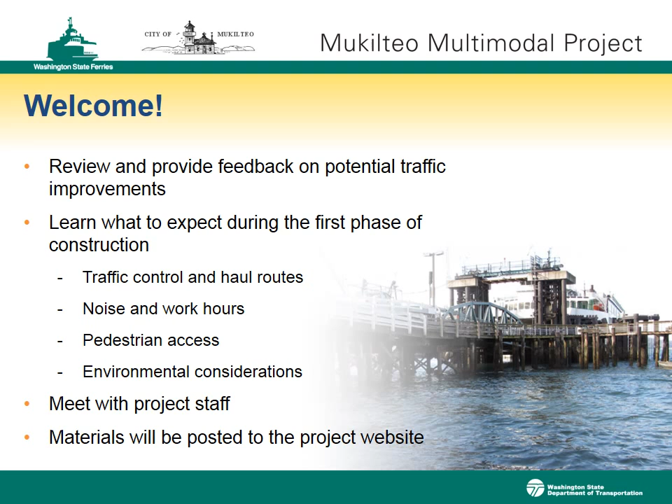First, let's briefly review the need for the project. The Mukilteo Ferry Terminal is more than 60 years old, and its timber piling foundation is vulnerable to earthquakes. The Mukilteo Clinton route is one of Washington State Ferries' busiest, serving almost 4 million passengers every year. The current layout makes it difficult for passengers to get in and out of the terminal and contributes to congestion, safety concerns, and conflicts between vehicles and pedestrian traffic.

This project replaces the aging dock and builds a safe and efficient new facility that enhances access to transit, including the Sounder commuter rail and bus service. This is a critical improvement to manage the projected growth in walk-on ridership on the Mukilteo Clinton route.

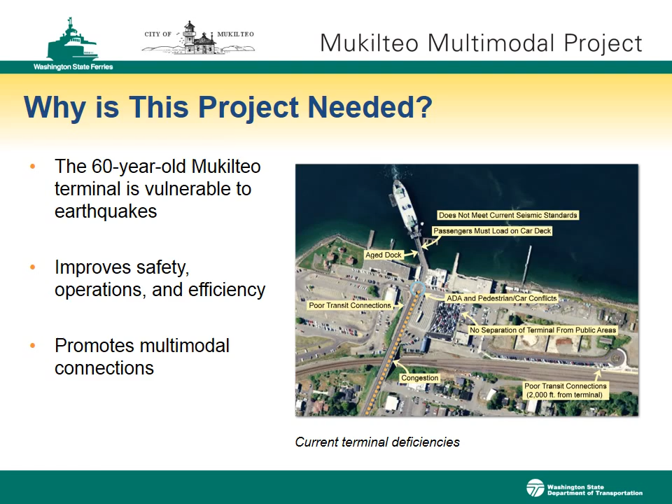The new terminal will be located just east of the existing facility. Key features include new terminal buildings and 4 new toll booths, an expanded vehicle holding area, a new transit center, and close proximity to the commuter rail station. The existing tank farm pier will be removed, eliminating thousands of tons of toxic creosote-treated debris from Puget Sound.

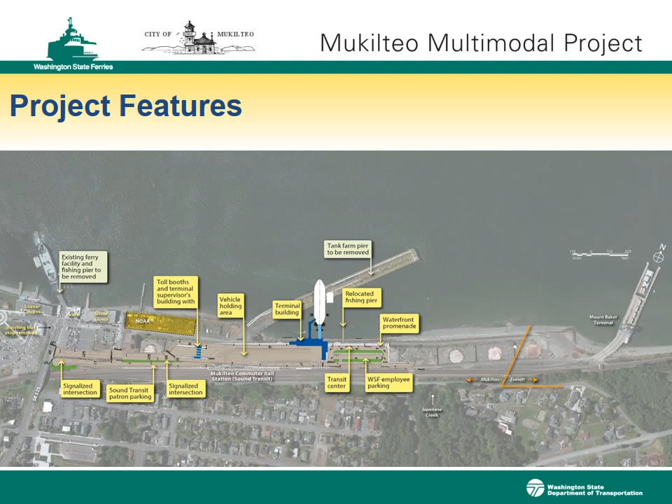The new passenger building will serve as the new ferry terminal hub and includes an overhead passenger loading ramp connecting to the second story of the new passenger building. It will be designed to reflect the cultural significance of local tribes and the history of the Mukilteo Point Elliott area. This project meets LEED Silver environmental requirements, and the design will limit building height to protect the view of the waterfront.

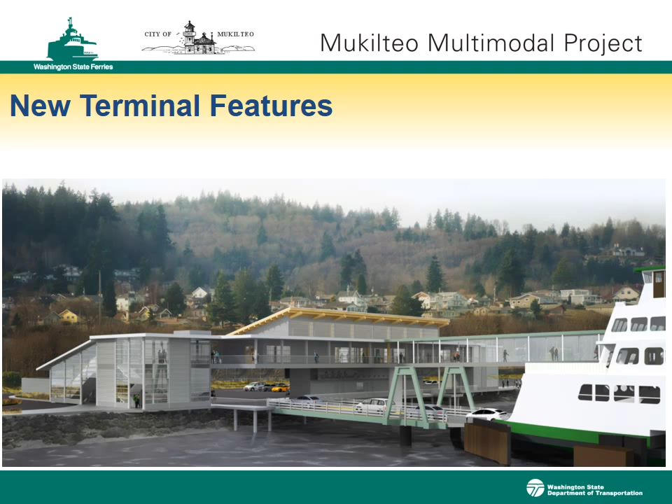The first phase of construction begins in early 2015 and features removing the existing tank farm pier and dredging at the new terminal site. The second phase of construction is scheduled from 2017 to 2019 and features building the new ferry terminal. The new terminal is scheduled to open in 2019, depending on funding.

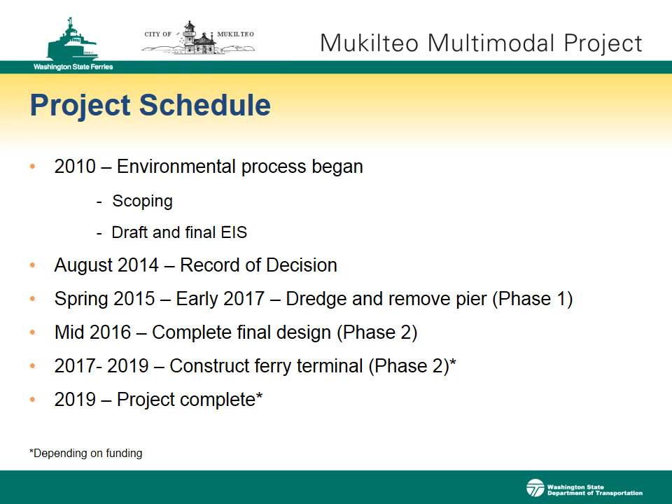Washington State Ferries' long-range plan projects a 73% increase in total passengers, excluding vehicle drivers, on the Mukilteo Clinton route by 2030.

The traffic analysis prepared as part of the EIS extended the long-range plan estimates to 2040. We expect a 124% increase in walk-on passengers during westbound evening peak hours. This will provide more efficient and safer multimodal connections for passengers on the Mukilteo Clinton route. Meeting these projections is a central aspect of the project.

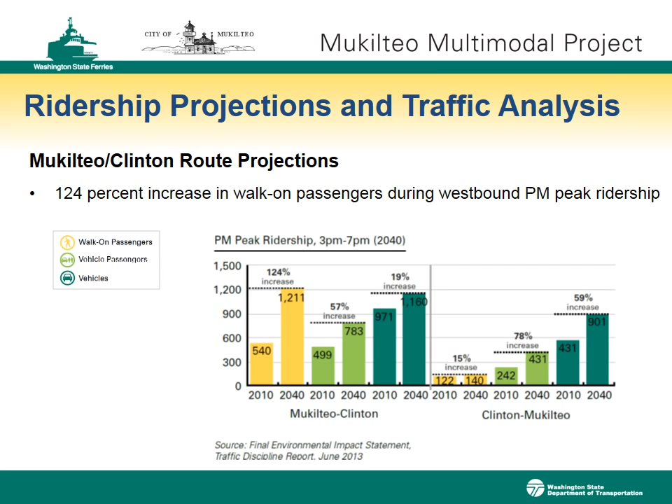Washington State Ferries and the city have heard your concerns regarding traffic near the terminal. We'd like to share with you 2 planned traffic improvements, as well as hear your opinions on additional improvements being considered in the area. Following the presentation, you'll have the opportunity to provide comment on potential traffic improvements and share new ideas.

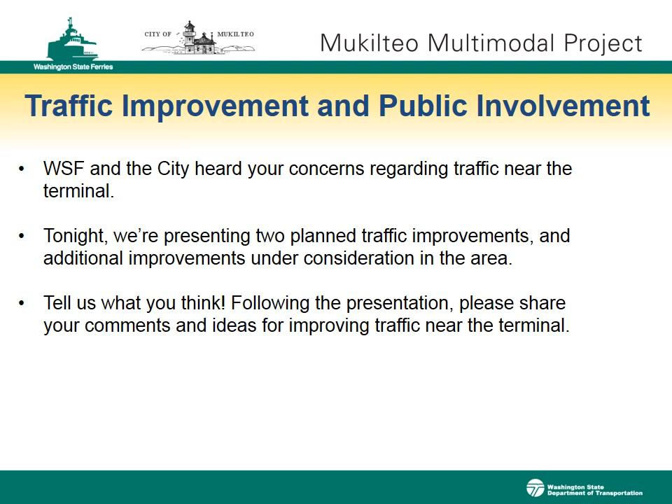The project includes 2 planned improvements, the first of which is to use the 2 new traffic signals to meter traffic as it offloads the ferry, allowing for breaks in traffic entering SR 525.

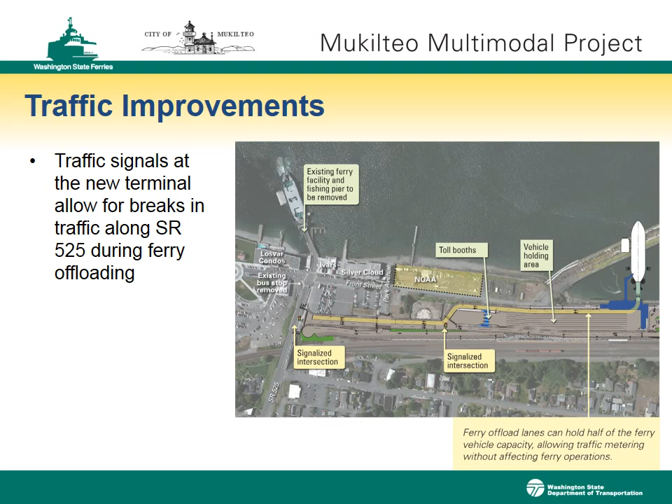Additionally, Washington State Ferries has identified 5 intersections where brush clearing and grading would improve sightlines for drivers entering SR 525. Signage could also be installed in holding lanes to limit car holding near intersections with limited sightlines.

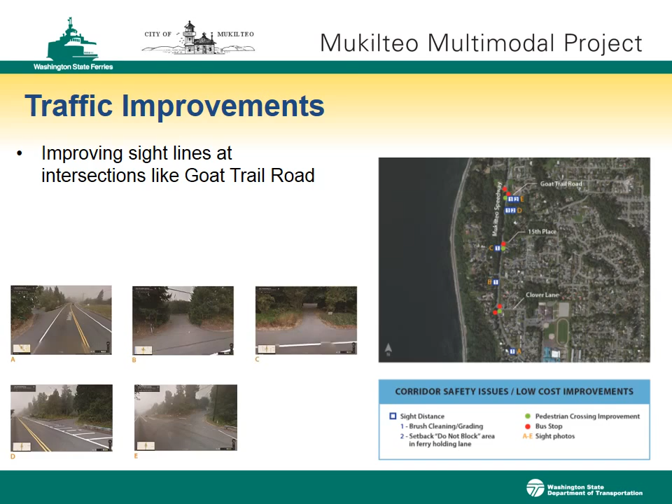The traffic analysis in the EIS identified 2 signals that would operate below acceptable level of service in 2040, at SR 525 and 5th Street, and SR 525 and 88th Street Southwest.

We heard from you at the Shoreline Permit public comment period. Washington State Ferries and the City of Mukilteo are working closely to identify other traffic improvements.

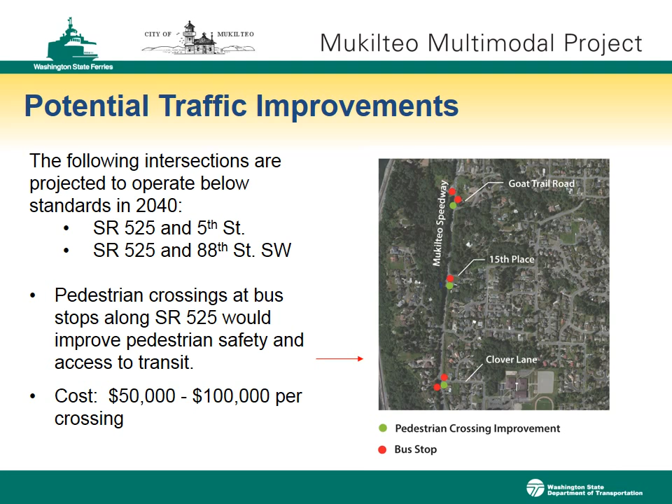A pedestrian overpass would improve safety and convenience for pedestrians and bicyclists accessing the waterfront. The City Council selected the SR 525 and Park Avenue plans as preferred alternatives.

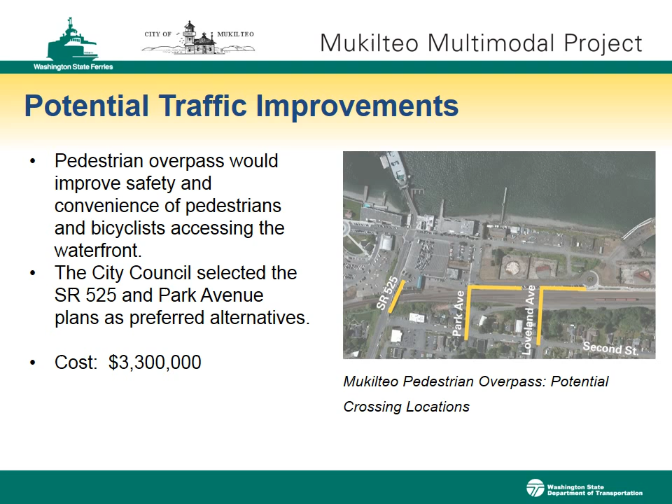There are also options for widening SR 525 at the Goat Trail Road intersection. Both options are pictured below.

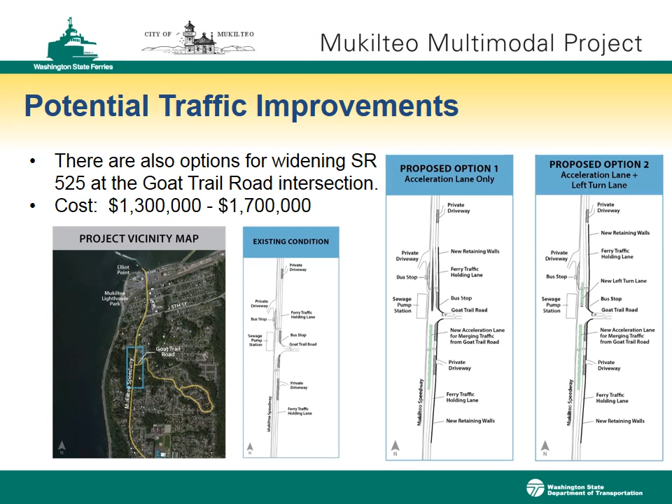Now we'll cover what to expect during Phase 1 construction. In-water construction will pause from mid-February through July in 2015 and 2016 to protect birds and wildlife, though other light work may continue during the spring-summer window. Phase 1 construction will be complete in early 2017, and construction of the new terminal will begin, depending on funding. Throughout construction, the ferry terminal will remain open.

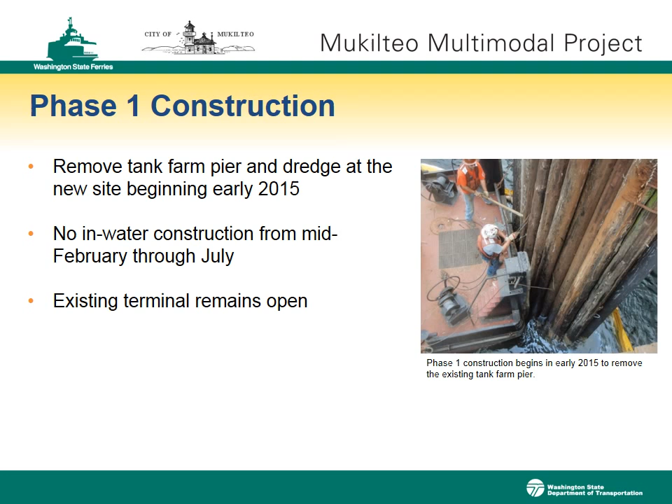Truck haul hours during Phase 1 construction are 7 a.m. to 2:45 p.m. Monday through Thursday, and 7 a.m. to 1 p.m. on Fridays. Incoming trucks will access the project site through the third toll booth through the ferry queue lane to bypass the Front Street SR 525 intersection. The third toll booth will be designated for construction vehicles during these designated hours.

Approximately 85% of all materials removed from the existing pier will be hauled out by barge, further limiting truck traffic. About 150 truckloads may use upland haul routes for removal of non-timber material from the pier and portions of the pier closest to the shore.

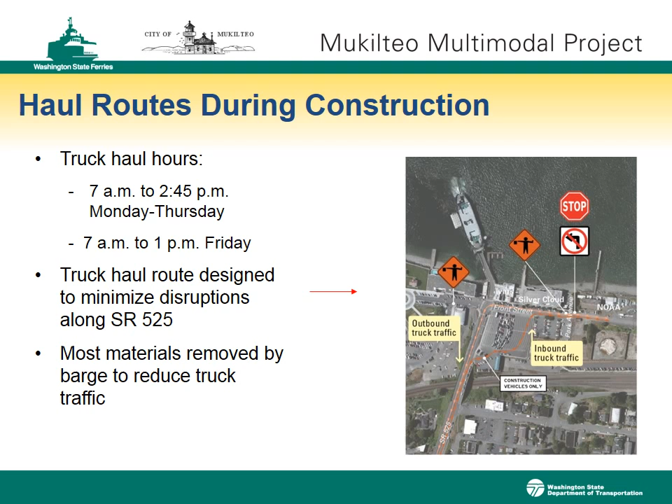Noise-causing construction is limited to weekdays from 7 a.m. to 6 p.m. and Saturdays from 9 a.m. to 5 p.m. Noise-causing work can only occur outside of these times by special permission from the city. Washington State Ferries may request exemptions for special and unusual circumstances.

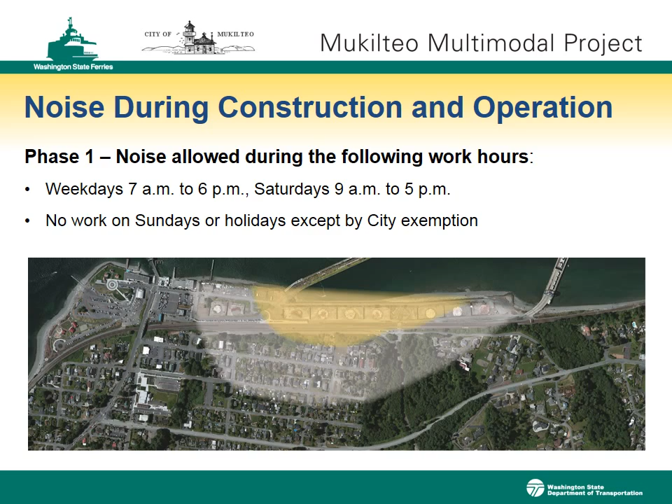Construction of the new terminal during Phase 2 will be slightly louder because of pile driving equipment required to build the new facility. Noise restrictions are the same as Phase 1. PA announcements at the new terminal will occur between 9 a.m. and 6 p.m. if required.

Emergency announcements may be made outside of normal hours. The new terminal will feature a smarter PA system with volume controls and speakers in multiple locations, which means less noise outside of the terminal area.

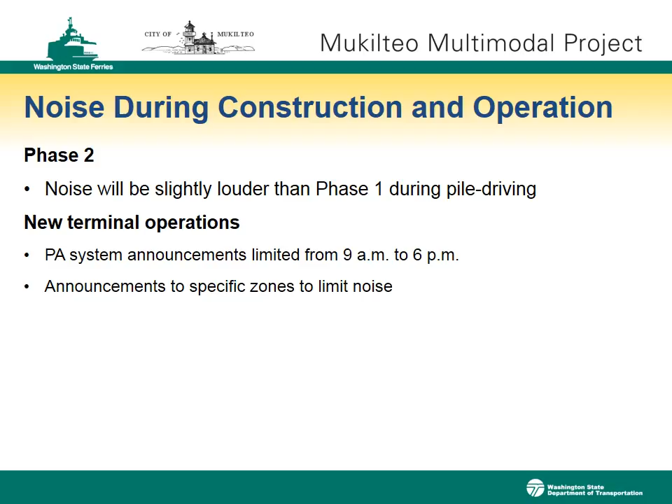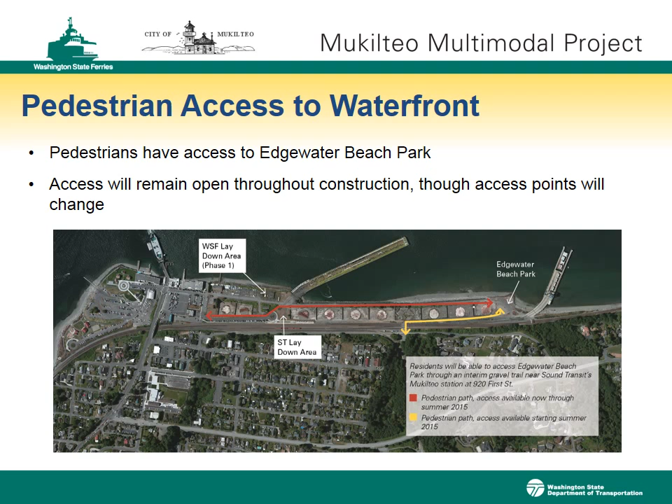Washington State Ferries will closely monitor the project site to meet all water quality standards during pile removal, installation, and dredging. Stormwater will be collected and treated during operation of the new terminal.

Recreational activities such as diving and kayaking will be limited at times during construction. Washington State Ferries will reach out to the diving and recreational waterfront communities to share information and ensure public safety around the project site.

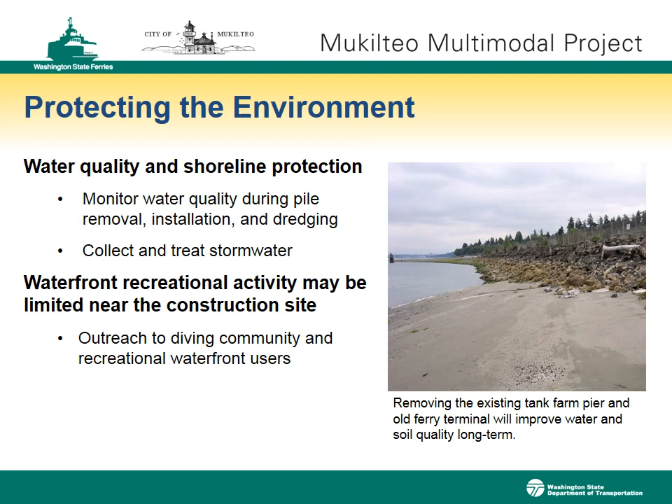Construction and new terminal operations will not have a measurable impact to fish, birds, or other wildlife. In fact, removing nearly 3,900 creosote-treated timber pilings will create a healthier environment.

The final environmental impact statement for the project includes several requirements to mitigate impacts to the environment, including having biologists on site to monitor nests and young birds in the project area, and only disturbing nests if they're threatened by construction.

Seasonal restrictions on heavy construction will limit impacts to fish and crab populations near the pier.

Following today's meeting, the project team will review comments and suggestions to identify the most important traffic improvements in the area. A contractor will be hired to dredge and remove the tank farm pier, and Phase 1 construction will begin.

Phase 1 construction will conclude by 2017, at which point the project will continue with construction of the new terminal in Phase 2. Depending on funding, the new terminal will open in 2019.

Stay tuned for future public involvement opportunities as the project progresses.